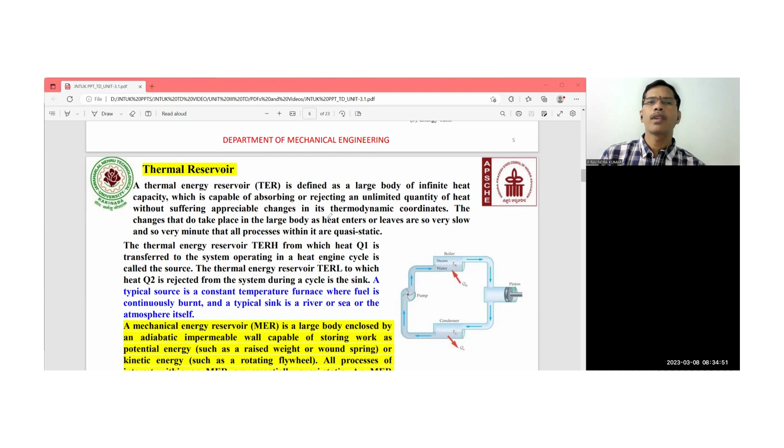A typical source is a constant temperature furnace where fuel is continuously burned. Whereas for the sink, it is the river or sea or atmosphere itself, right? That is the meaning of this thermal energy reservoir.

In connection with that, there is one more thing we have to observe: there is also a mechanical energy reservoir. It is a large body enclosed by an adiabatic impermeable wall capable of storing work as potential energy or kinetic energy, such as a flywheel. All processes of interest within a mechanical energy reservoir are quasi-static. A mechanical energy reservoir receives and delivers mechanical energy quasi-statically.

So a mechanical energy reservoir is also a large body, right? That large body stores energy in terms of kinetic energy or potential energy. But that storage is essentially quasi-static in nature. So a mechanical energy reservoir receives and delivers mechanical energy quasi-statically, right?

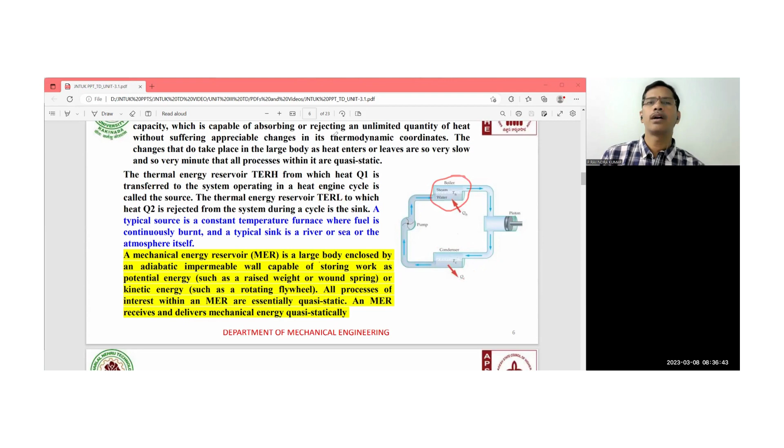So the student has to observe the thermal energy reservoir of the hot source and the thermal energy reservoir of the low temperature sink. This is the high temperature source, and this is the low temperature sink, right? The student has to understand this particular side.

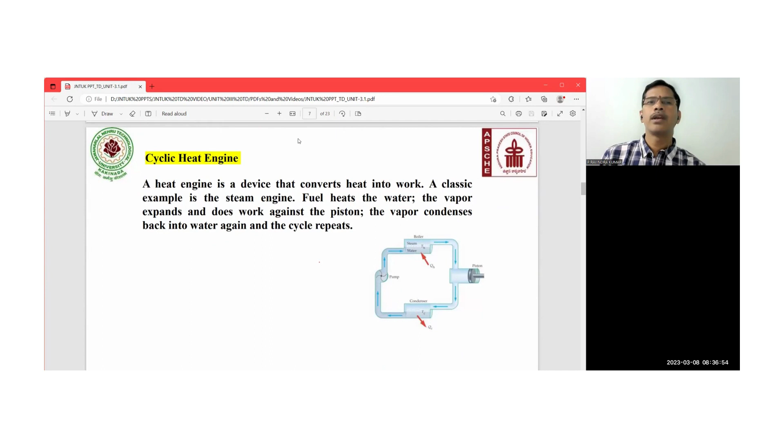Next, the cyclic heat engine. The cyclic heat engine is nothing but a heat engine device which is fitted in between the source and the sink. Cyclic, so observe cyclic. It is the heat engine that is fitted in between the source and the sink, right?

And this engine, this is the heat engine which is going to convert heat into the work, right? So this particular reservoir is taking the heat Q1 and rejecting some amount of heat by producing the work. So the classic example is the steam engine. So this is nothing but a steam engine, right?

So fuel heats the water, the vapor expands and does work. So here the vapor is going to be expanded. Once the vapor gets expanded and this is going to move in this direction, you will get some work output. The vapor condenses back into the water again and the cycle repeats. Once the expansion is over, this vapor will come back into the condenser and it is going to come out as a liquid, and again with the help of a pump, the liquid will be pumped from lower level to the higher level.

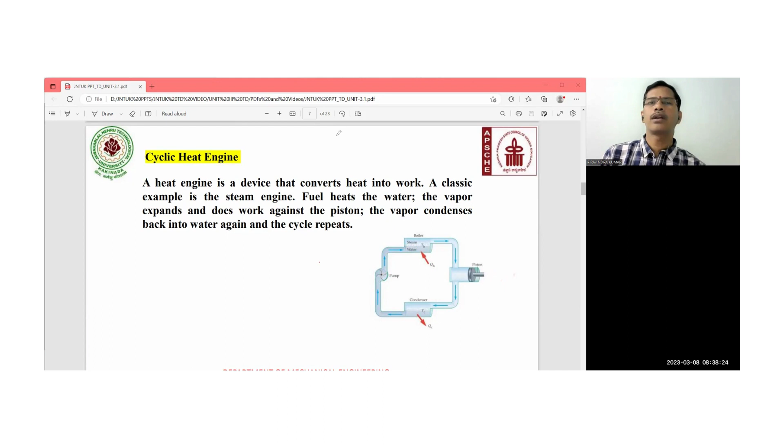So this is nothing but a cyclic engine. In this particular cycle, it converts the heat energy into the work energy, right? So that a student has to understand. Now coming to the heat engine. This is the engine, and this is going to take the heat, that is Q1, and this is going to reject the heat Q2 to the cold reservoir, and it is going to produce the work output. So this net work output is nothing but equal to Q1 minus Q2, right?

So in this heat engine, all the power output devices, you will mention it as a thermal efficiency. This is nothing but the eta. Eta is nothing but thermal efficiency, and it is going to indicate the efficiency. Now you are going to find out the thermal efficiency. This thermal efficiency is nothing but the net work output divided by the heat supplied. So what is the heat supplied? This portion will be the heat supplied, right? So W net is equal to Q1 minus Q2, divided by Q1.

In terms of the temperature, let me put it in brackets, efficiency is equal to T1 minus T2 divided by T1. So this is the T1 and this is the T2, right? So this is how you are going to be able to find out the efficiency of a heat engine. There are a few numerical problems also connected with this particular content, so that you can easily analyze the efficiency. So this is the efficiency, right?

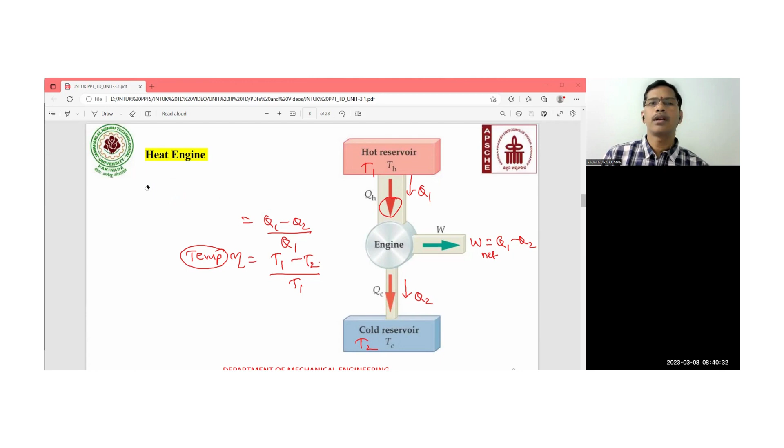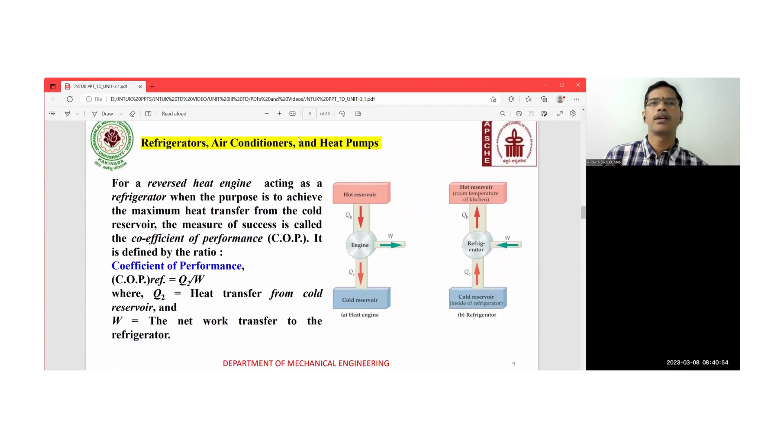Because it is the power output, that is by taking some heat energy, producing the net work output by exchanging heat with another reservoir, that is the cold reservoir, right? So this is the heat engine concept. Next one is the refrigerator, heat pump. So this is the heat engine. Next one is the refrigerator, air conditioner and heat pump.

So what is this going to do? Observe the heat engine. This heat is taking, that is Q1. This heat is rejecting, that is the heat Q2, right? You will get the net work output. But to transfer the heat from low temperature reservoir, that is inside the refrigerator. So this is the refrigerator. Refrigerator is nothing but the space. It is the space to be maintained at a temperature lower than the surroundings.

Say suppose you want to maintain this one at minus 5 degrees centigrade and the outside is 30 degrees centigrade, right? So now here you have to analyze this. Here the duty is that it has to transfer the heat from the low temperature reservoir to the high temperature reservoir. So this is in terms of Q1 and this is in terms of Q2.

You have to give some, that means you have to spend some work input. So here the work input is required, and here this is the work output. So for these cases, that is for refrigerator, air conditioner and heat pumps, we will express things in terms of the coefficient of performance.

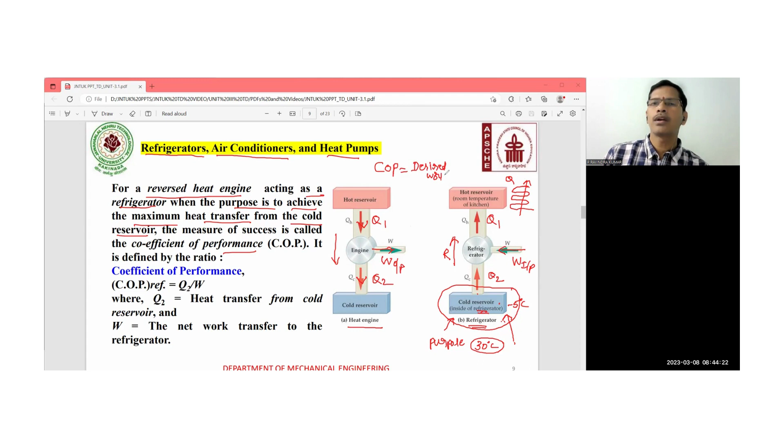So here the heat is rejecting, and the desired thing is: the coefficient of performance is defined as the ratio of desired effect divided by work input. What is the desired work here?

Whatever amount of heat is entering into that space, you have to reject, that means take out, that particular heat. So the desired effect focuses on this side. That's why the coefficient of performance for a refrigerator is equal to Q2 divided by work input. Q2 is nothing but heat transfer from the cold reservoir, that is the heat you have to take out.

The net work transfer to the refrigerator: Q1 is nothing but equal to W plus Q2, that is work input plus Q2. So all these things are joined here, and this is what the work represents.

So that is all about the air conditioner. For air conditioner, refrigerator and heat pump, we express things in terms of the coefficient of performance, defined as the ratio of desired work to work input. Here the desired work is nothing but Q2, which is of interest because you need to maintain as low a temperature as possible. If it is designed at minus 5 degrees centigrade, that temperature has to be maintained continuously, otherwise the refrigeration purpose is not solved.

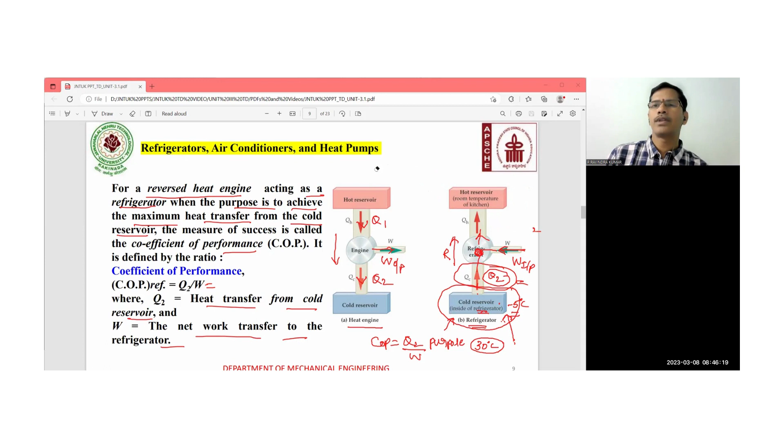So this is the refrigerator. Now, in the same way, you can also discuss the air conditioner. The purpose of the air conditioner is nothing but to maintain the room at a low temperature compared to the outside temperature.

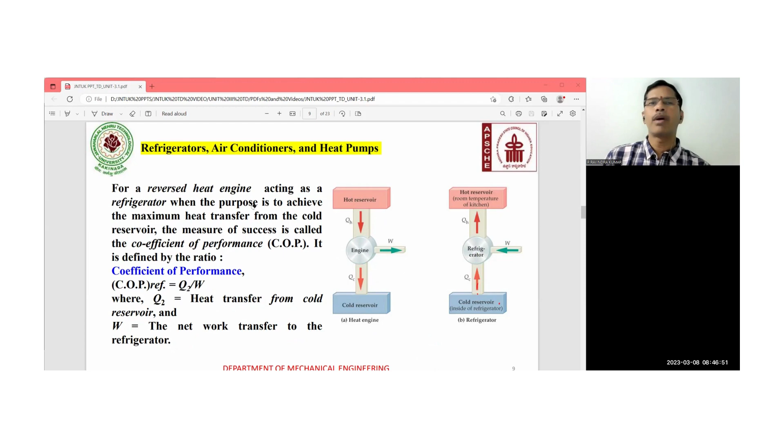So for the air conditioner also, you are going to mention its coefficient of performance. What is the coefficient of performance of a refrigerator, or of an air conditioner, or of a heat pump? This is all about the air conditioner. The same thing you can work out. So let me write something here.

So for the air conditioner, COP is equal to the desired effect. You can mention this in terms of Q2 divided by work input. So COP equals Q2 divided by Q1 minus Q2. This is the work input, this is Q1 minus Q2. What is Q1? Q1 is nothing but equal to Q2 plus W.

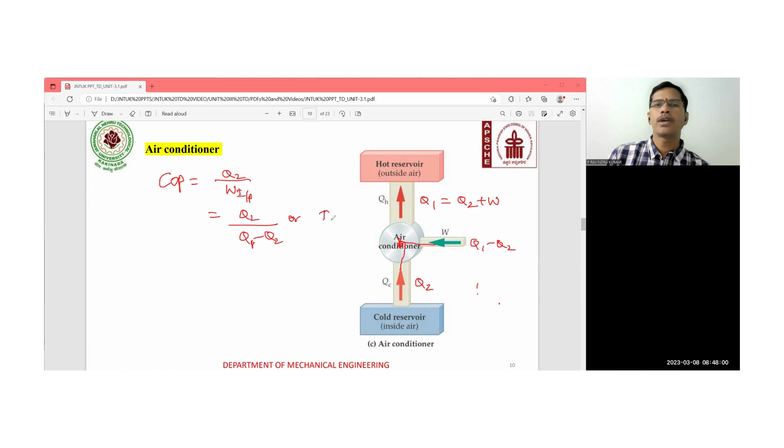So this is how, in terms of temperatures, it is sometimes mentioned: T2 divided by T1 minus T2. Sometimes this is T2 and this is T1, or it is TH and TC, or TL. The notations will be like this, either of which you can follow. So in terms of temperature, the coefficient of performance is found like this.

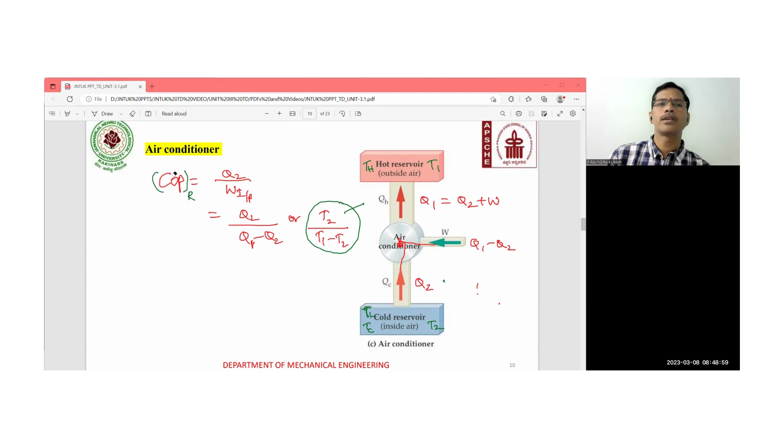That is for an ideal Carnot, reverse Carnot engine. If it is a reversed Carnot heat engine, then you have to use this particular formula for the coefficient of performance of a refrigerator or air conditioner. So that is the air conditioner.

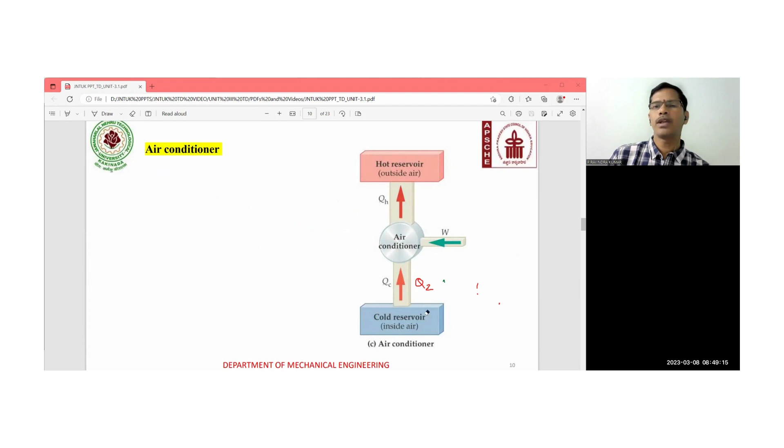Next we move on to the heat pump. The significance of the heat pump is especially in winter season, in areas like Himachal Pradesh, Jammu Kashmir, the northeastern states, where the outside temperature is lower and the body cannot accept that lower temperature. In such cases you need to maintain room heaters.

So this is the hot reservoir. For the heat pump also you need to mention the coefficient of performance. The coefficient of performance of a heat pump is equal to... here also the notation is Q1 and Q2, and in terms of temperature this is T1 or TH, and this is T2 or TL, the low temperature reservoir.

So here this is the desired effect. That means suppose the outside atmosphere is -5 degrees centigrade, and the body cannot accept that all the time. So you need to sit in a room, and that room has to be maintained at 30 degrees centigrade, which is acceptable to the body.

But if the room is perfectly insulated, no problem. But if you open the door or window, the -5 degree heat enters the room, and then you cannot maintain 30 degrees inside. In that case, to transfer heat from the low temperature reservoir to the high temperature reservoir, you need to give some work input, so that the heat pump performs the desired effect. Here, for the room heater, the desired effect is nothing but Q1.

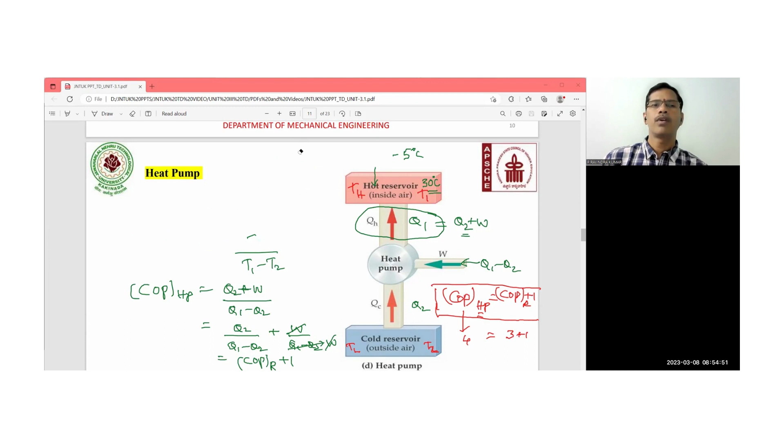Okay, hope these particular things are clear. Coefficient of performance of heat pump is this one. Next one, we will study the second law of thermodynamics.

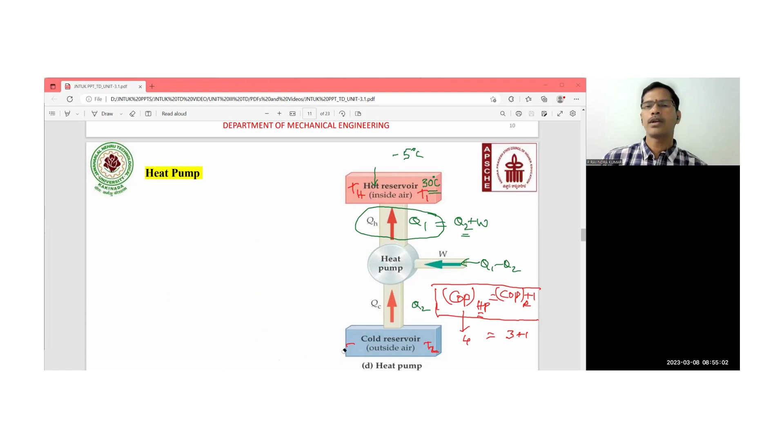In the second law, there are various persons also connected to that particular second law, authors or scientists connected to the second law. Now we want to prove that whoever may be the author, their main intention is proving the second law statements are equivalent. So the authors or persons are different, but the law is the same.

So the heat pump is over. Now come to the second statement of the second law of thermodynamics. So what is this law going to indicate? This law is going to state that the second law of thermodynamics has been enunciated meticulously by Clausius.

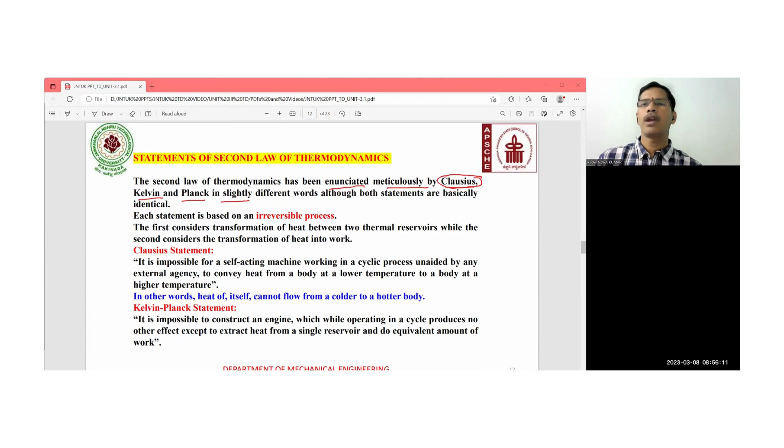Clausius, and another person is Kelvin and Planck. We can call it the Kelvin Planck statement and the Clausius statement, in slightly different words. Observe this, the words are different here, although both the statements are basically identical.

So each statement is based on the irreversible process, so that you should understand. Each statement is based on the irreversible process. So the difference between the reversible process and irreversible process, that basic concept we have covered.